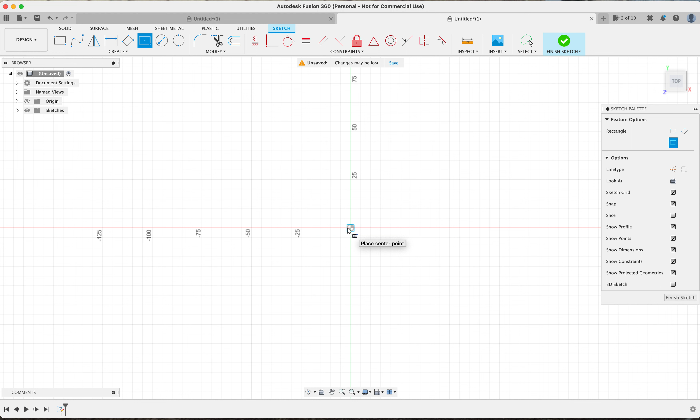We're just going to do a basic 100 by 100, 100 mil by 100 mil steel plate. Well, it will be cut out of steel because that's just what I do - I draw a lot of products to get laser cut, so we'll just go with what I know. So 100 by 100, that's our sketch. Now I like to...

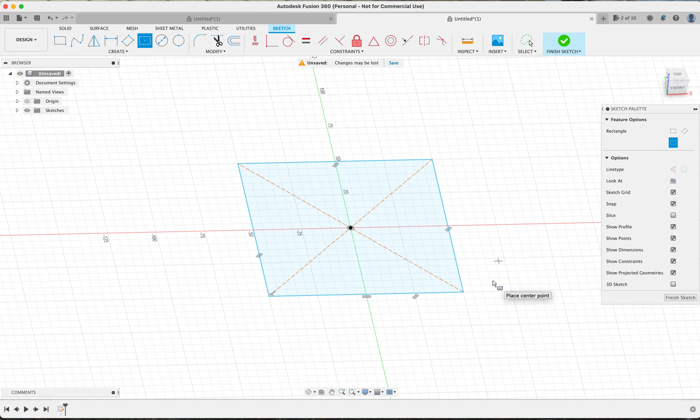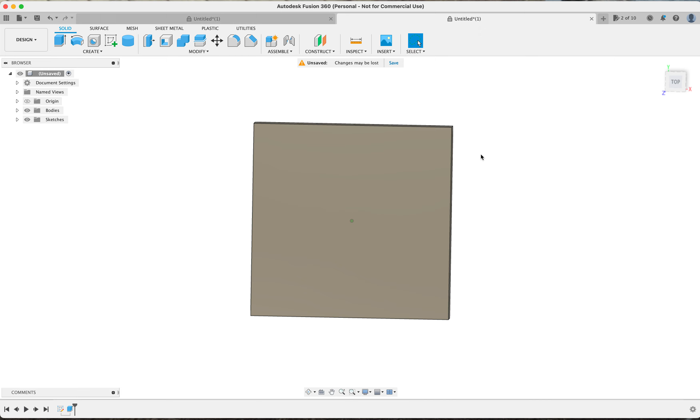extrude the sketch to the thickness of the material that I'm going to get it cut out of, just because I like to see it on the screen in like a three-dimensional shape. So we'll hit the letter E for extrude on this face here. Now this is going to be cut out of 10 mil steel, so we'll go 10, enter, and we have a 10 mil steel plate that is 100 mil by 100 mil.

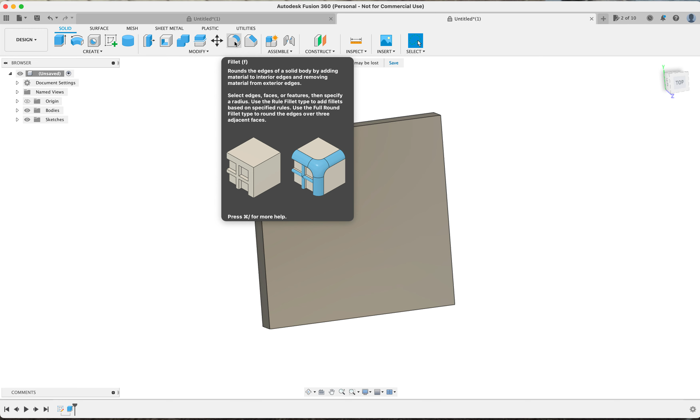Now we're going to put a curved corner on this. So we come up to the fillet tool - I'll let you guys read that bit - it puts a curved radius on a corner. So we hit that. Now you'll see how it kind of highlights it in black as you hold it over a corner. So we want these corners here, and it will say that it's selected when it turns blue.

Now you don't necessarily have to rotate the picture to access the edges in the fillet command. You can see it will bring up edges as you hover over them. So we'll just make sure we select that one, select this one, and select that one.

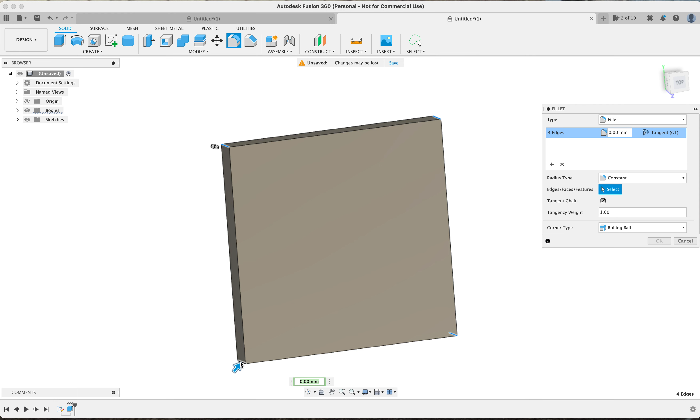Now I'm going to go a 15 millimeter radius, and then I hit enter, and then I will hit the top view on the cube just to realign me. So I'm just looking at it square on, because this isn't actually for three-dimensional cutting. This will be cut on a two-dimensional machine, so it'll be cut out of a flat product.

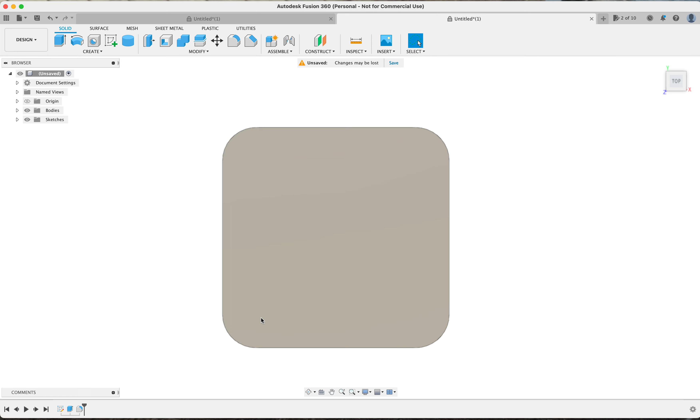Now I want to put some holes in these corners just so I can bolt this plate to the floor. So I'll hit H for the hole command. Excuse me, sorry about that.

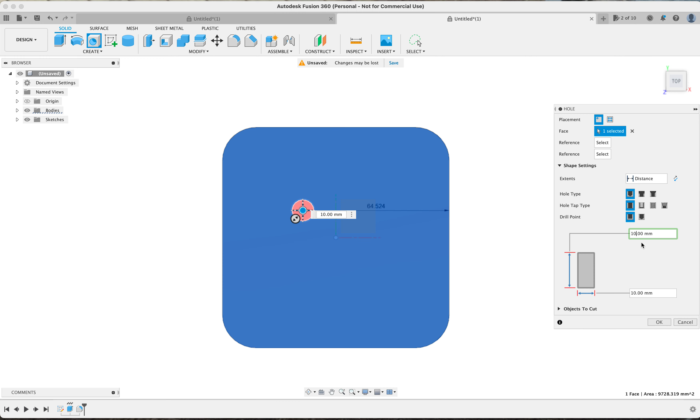We're just going to go a simple hole over here on these three. We'll click the face that we want to put the hole on. Now over here you'll see we have the depth of the hole and the diameter of the hole. Our plate is 10 millimeters thick, so we know we want to be a minimum of 10 millimeters - that will give you a hole all the way through. And we want a 10 mil diameter because we're going to put a 10 mil Dynabolt in there.

Actually, thinking about it now, if we're going to go a 10 mil Dynabolt, I might go a 12 mil hole, and that will just give me a little bit of clearance to get the drill bit and the Dynabolt in. Now I'm going to click and drag this little blue dot, and I'm going to drag it over here. A white dot will appear, which registers the center point of this radius. So you watch this.

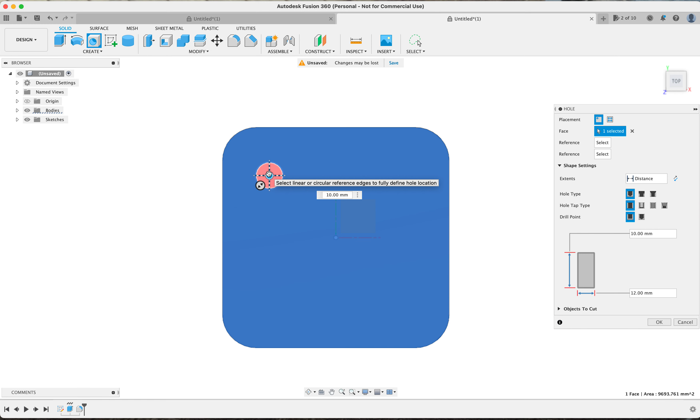We'll click it, we'll drag it, and it will actually automatically snap to that area when it gets close. Hit enter. Now I'm just going to quickly redo that with 3 more holes.

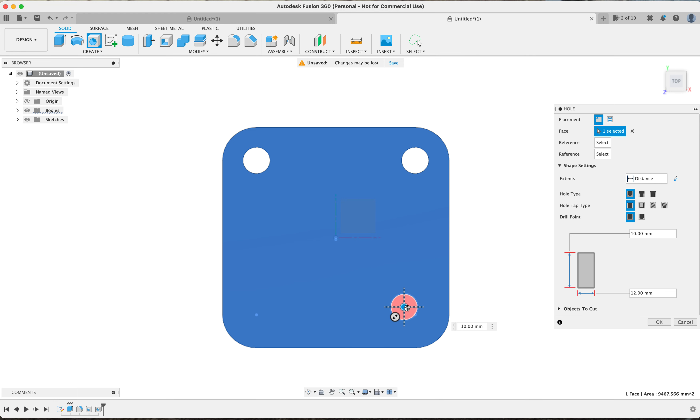If I can get my fingers working on the trackpad - there are different ways that you can do these holes. You can do it in a pattern, or mirror it, or there's numerous different ways to do stuff in Fusion 360, but for this exercise we're just doing it this way.

Okay, so we have our plate. You can see it in the 3-dimensional plane. It's a 10mm plate with 12mm holes and 15mm radius.

Now we turn sketches on over here - sketches - and we do the little drop down arrow, and we have a sketch. Now the sketch isn't the one that we want, so come up to the top here and hit create sketch.

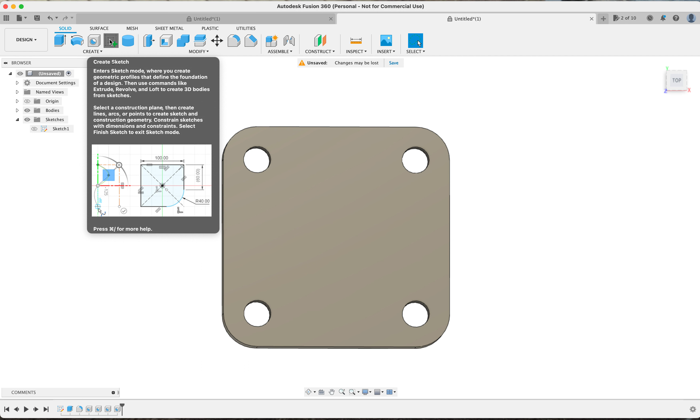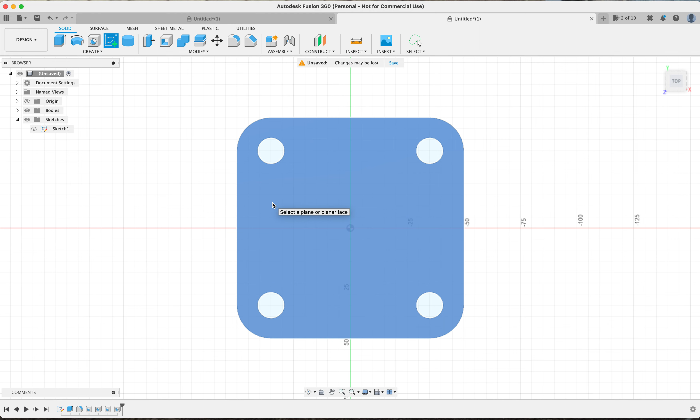Now I'll click on this face, and you'll see another sketch appear with a little red padlock on it, and that's the sketch we want. Click here, and you can see the little red padlock. Now that sketch is highlighted by the black perimeter and the black area around the holes.

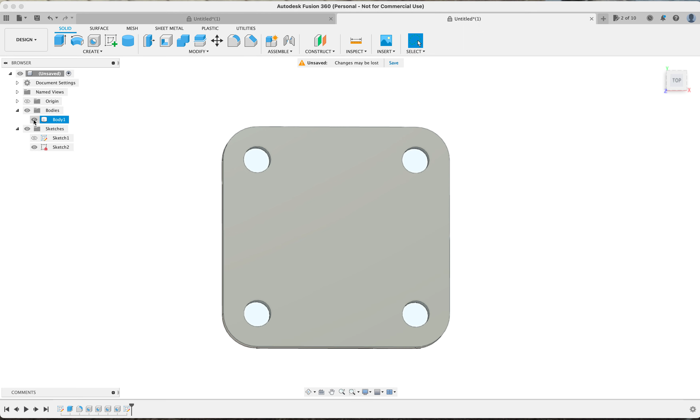That is what the machine is going to read as the DXF file, so we'll just finish sketch. Now for purposes of this video, I'll turn the bodies off, so the little eyeball, we'll get rid of the body, and you can see here we have our sketch back in the 2-dimensional plane.

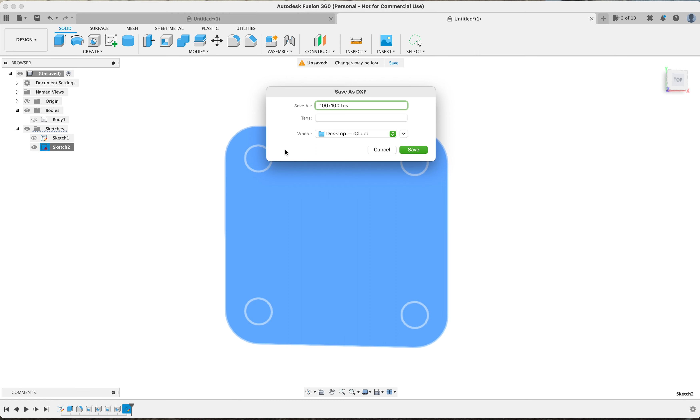So come over to sketch, control click, save as DXF, save, and we'll just call this 100 by 100 test. That's going to save to my desktop just for this purpose, and I hit save. Now you have a DXF file saved to your desktop, ready to email to your mate with a machine that can cut it out for you.

Now this shape can be anything you like, literally any shape you can draw, you can cut out. Obviously there are size limits depending on the machine being used. If you had a laser engraver at home, you wouldn't do a shape that's 1.2 meters square because you wouldn't fit it in the laser engraver, for example.

Now what I'll do is open another window up here. So we have a new window. Now I'm going to import that DXF back into Fusion and modify it. So we go insert, DXF. Now I've got to select the file.

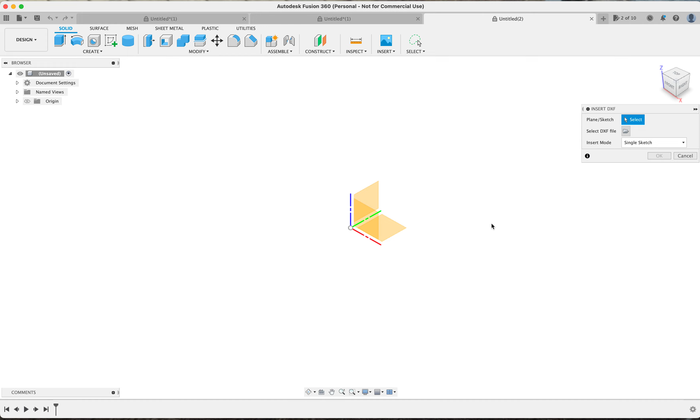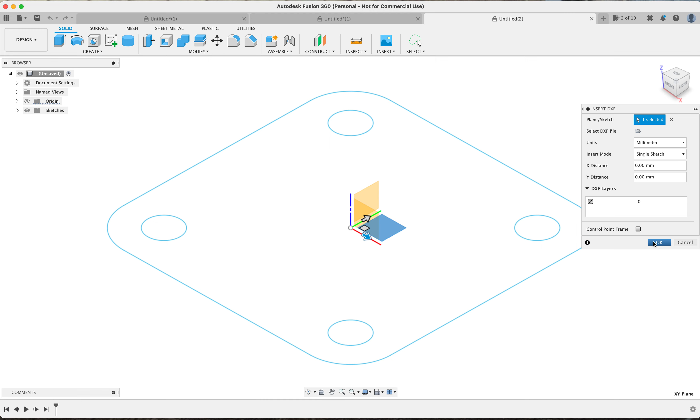So this is my desktop. Now we will do 100 by 100 test, the one we just drew. We select that, we open. Now I have to pick a plane, one of these three options for it to open on. So I'm going to pick the top plane, click on that, and it will take a few seconds, and then it will load up the DXF file. Come over to OK, hit OK, and you have your file back in the computer.

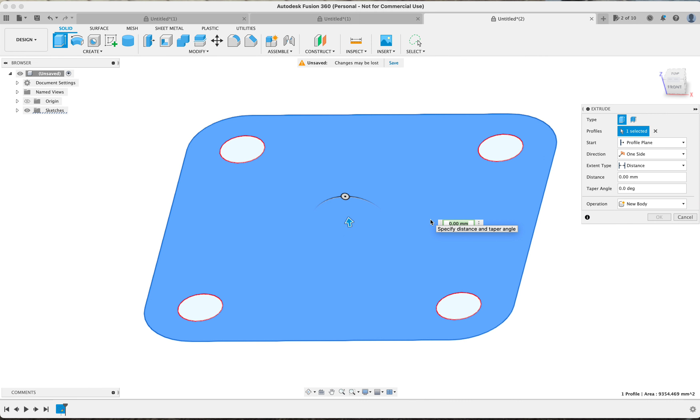Now, as I said before, I like to extrude the drawings to the thickness of the material it's going to be cut out of. So I'll hit the letter E, and we hit that face, and we're going to extrude it 10 millimeters. Hit enter, and there's our plate.

Now what are we going to modify it? All of a sudden someone has said to you, oh, we need a hole in the center because this plate is going to get welded to a post and it's going to be galvanized, for example. So we need a hole in the center to get the galvanized liquid out.

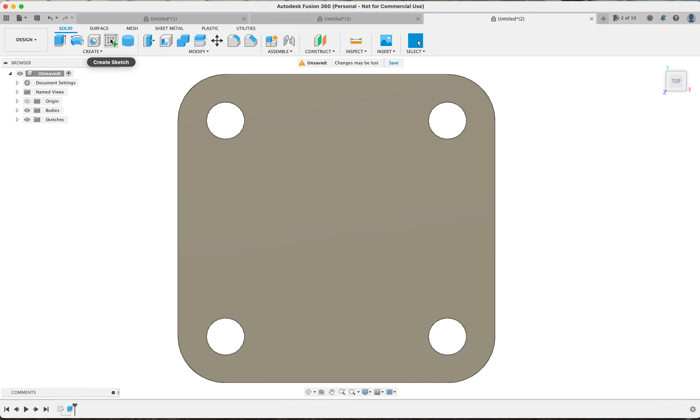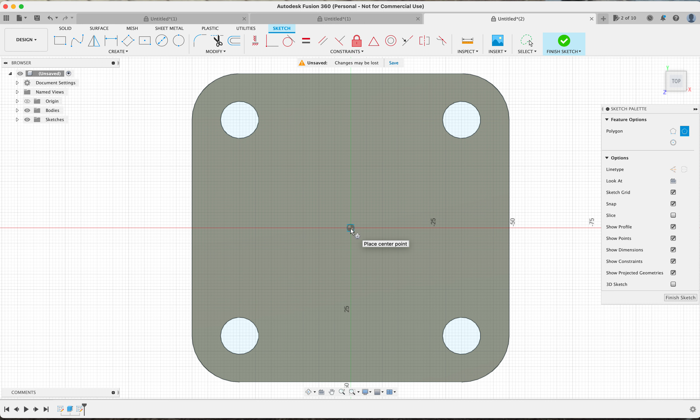So we will come to create sketch. We've got this plane selected. Now we want to do a hole, so we'll do a hole. Actually, no, we'll do something different - we'll do a hexagon because we can. So we'll put the hexagon in the center, you can put it wherever you like. And we'll do a 6-sided hexagon at, call it, 20 mil radius.

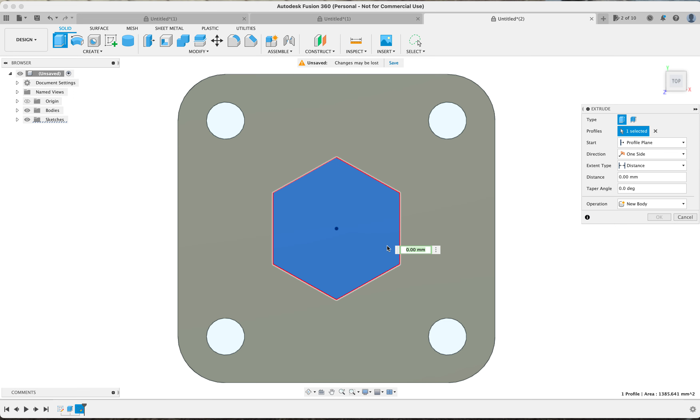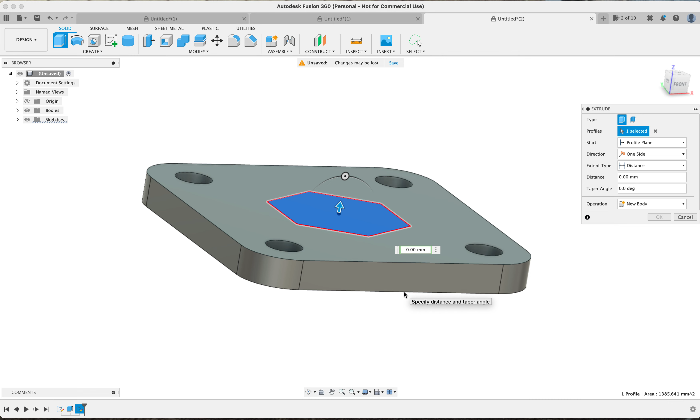Do that, now I'm going to hit extrude, and we'll get rid of that hexagon. So I'm going to do a negative measurement - you can either pull this arrow down or type in a negative measurement. If you want to cut it all the way through, the measurement needs to be at least the thickness of the material or greater. So we'll call this 10 mil. We didn't hit the negative, did we? So let's put a negative sign in front of it, negative, and then we have a cut.

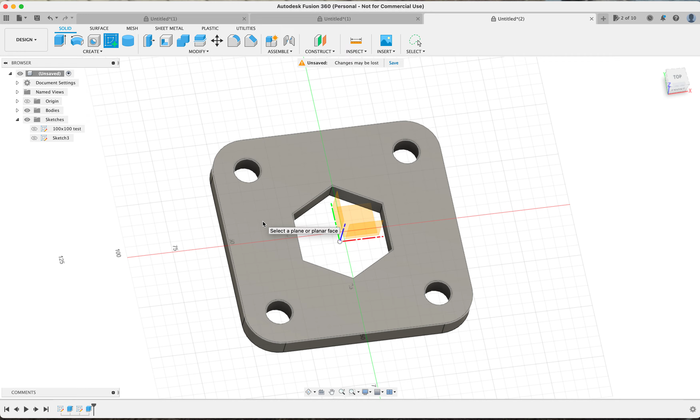Just like that. Now you can come over, we'll open up the sketch window again, and you just do what we did before. Create sketch on this face, the padlock appears on the sketch, locking the sketch in. Finish sketch. I will get rid of the body, turn the body view off, and we're left with the sketch.

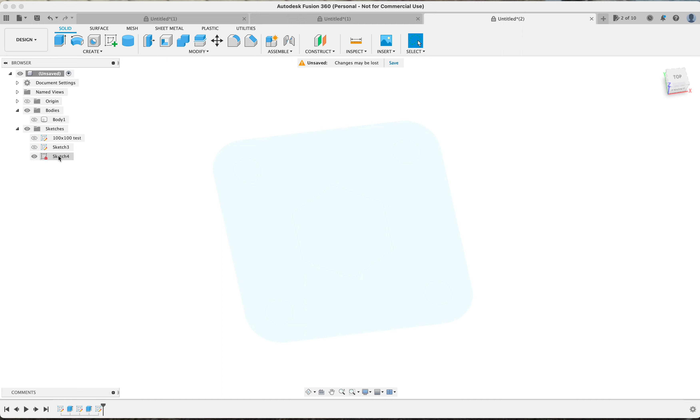Come over to the sketch, hit control click, and save as DXF. And there you go, we're back to square one. You can save it, label it, and pick the place where you want to save it. I won't save this one because you get the idea.

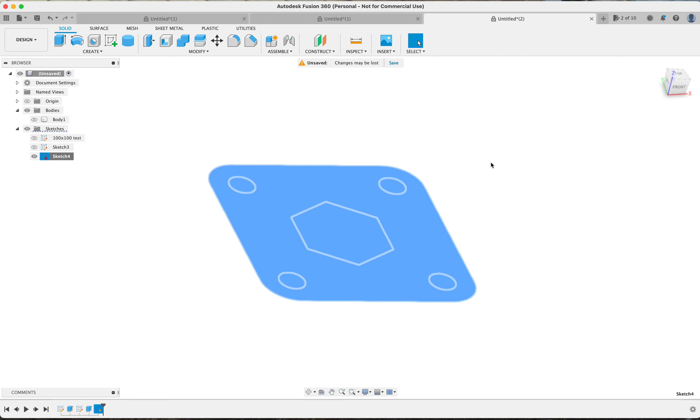So hopefully that sheds some light on drawing and saving DXF files. Hope you enjoyed that one, folks.